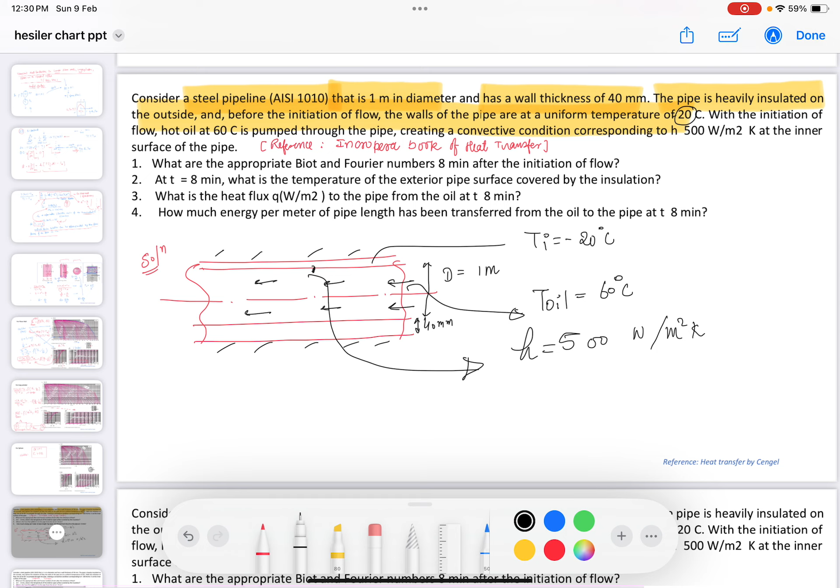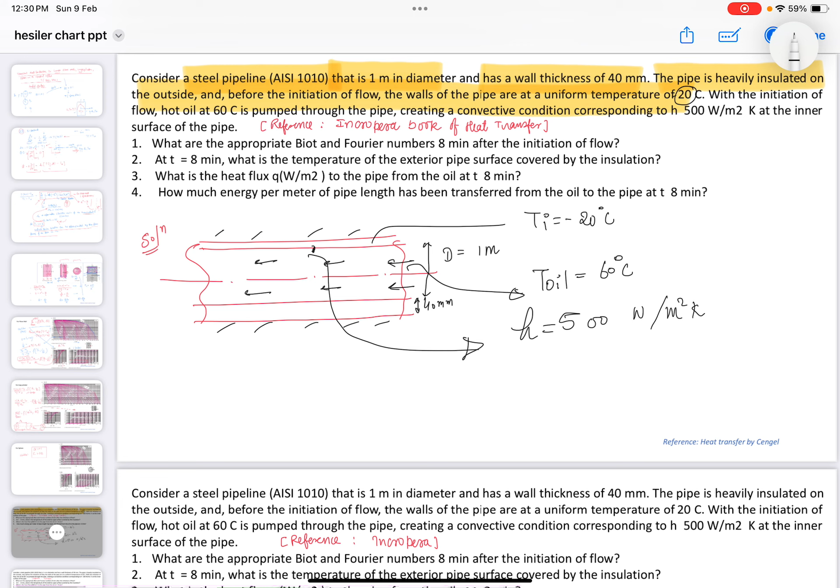So in the first case we have to find the Biot number and Fourier number. Before that, do you think we need anything else to solve this problem? Of course, material properties. Let me give you the properties for this problem.

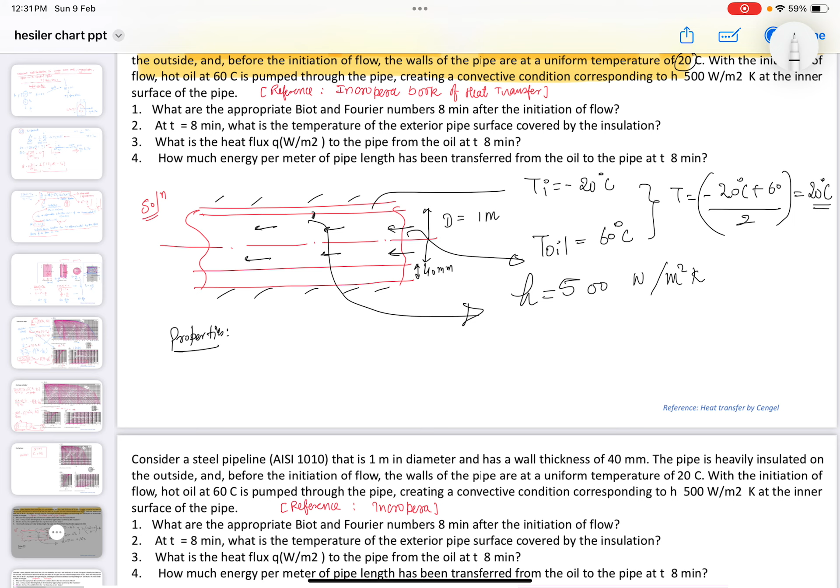Properties are generally a function of temperature for solids, and for liquids and gases a function of both pressure and temperature. But for simplicity of analysis, we take these properties at a mean temperature, which is nothing but the average of the two temperatures: minus 20 plus 60, divided by 2, giving 20 degrees Celsius. So properties are given at this temperature. For the solid, we need rho, specific heat, thermal conductivity, and thermal diffusivity.

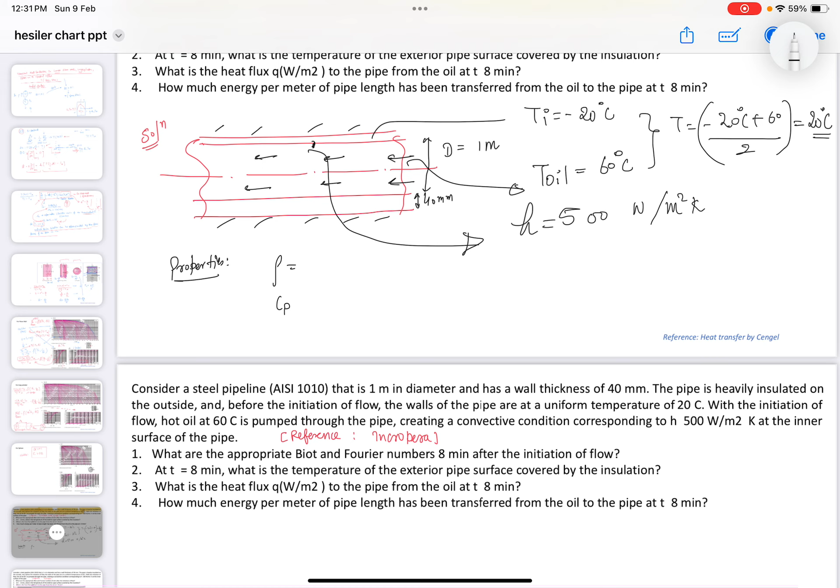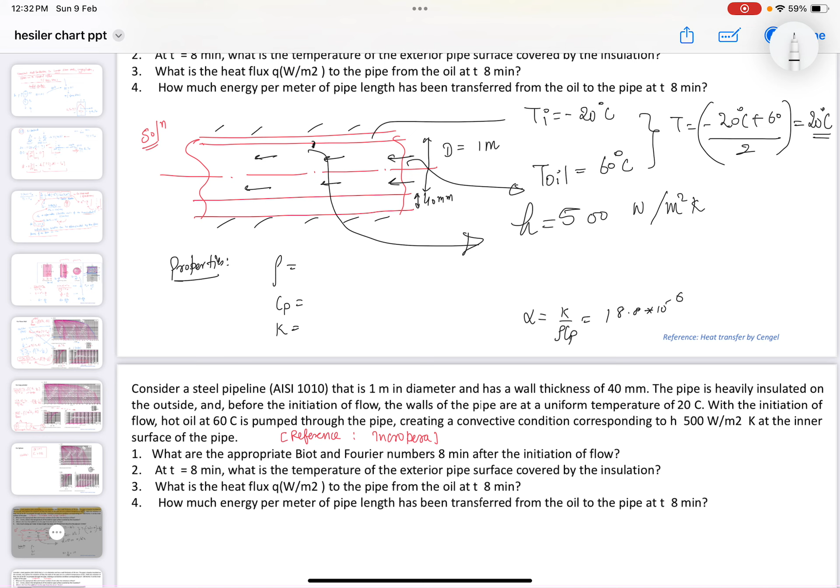Thermal diffusivity, which is nothing but K by rho Cp, is 18.8 times 10 power minus 6 meters square per second. Density is 7832 kg per meter cube. Specific heat is 434 joule per kg Kelvin. Thermal conductivity is 63.9 watt per meter Kelvin.

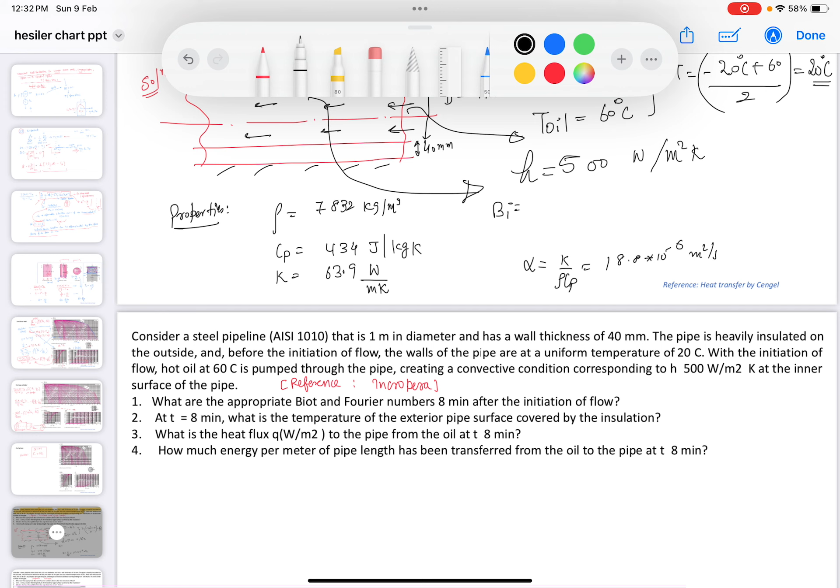Now we can find the Biot number. Using H, first we have to simplify the analysis - which geometry we should use. Since the thickness of the pipe is very, very small compared to the diameter, we can think of the thickness of the pipe as a plane wall.

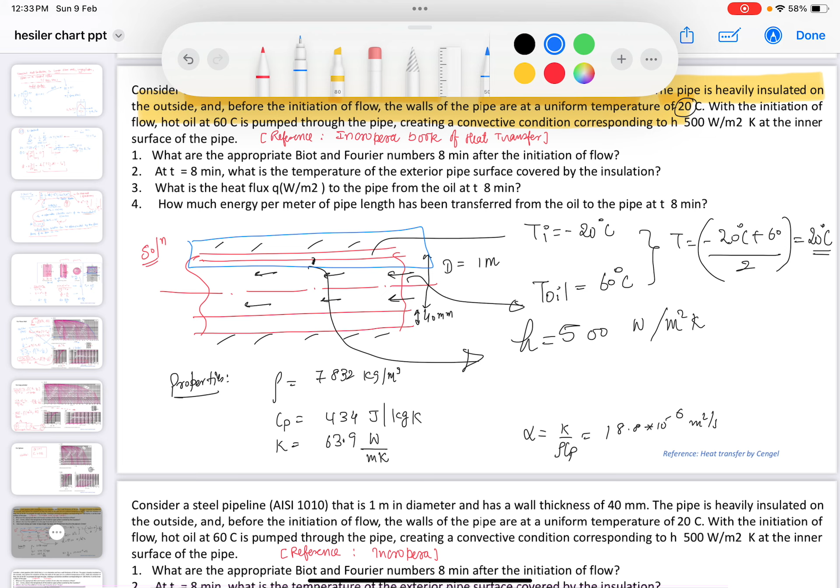We can consider this area as a plane wall, because the thickness is very, very small and we are considering only one dimensional heat conduction. Assuming it to be like that, it will look like this. If we see a close-up look, it has convection on this surface and is insulated on the other surface. So the plane wall case is very valid here.

H times T infinity - this is the x equal to 0 plane, and this is the x equal to L plane. This is steel, because of oil. So let's find the Biot number: it is nothing but H L by K. L is the thickness, 40 mm. H is 500, times L is 40 mm - we have to convert that into meters - and thermal conductivity is 63.9.

So the Biot number comes out to be 0.313, which is greater than 0.1. It means the lumped capacitance method is not valid here.

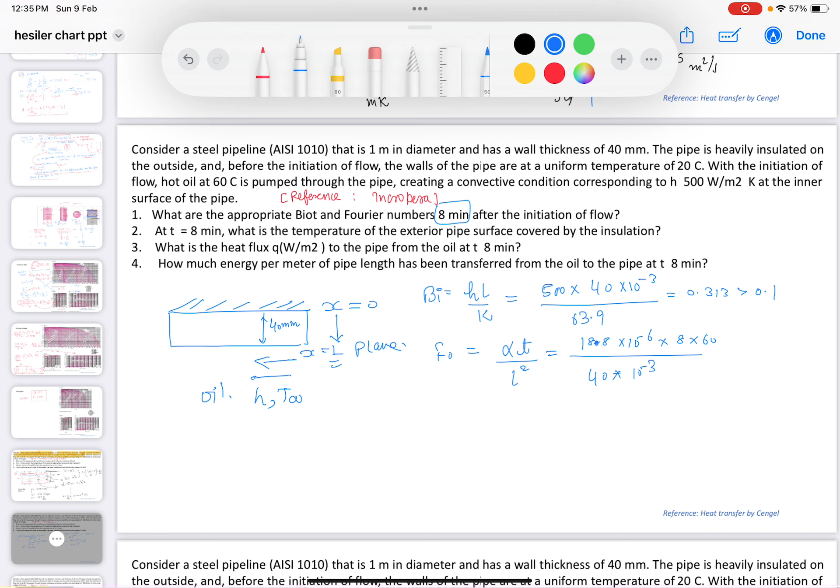Similarly, we can find the Fourier number. Fourier number is a dimensionless time, and for dimensionless time we need the absolute time - they have provided 8 minutes. L is 40 times 10 power minus 3, alpha is the thermal diffusivity 18.8 times 10 power minus 6, times 8 minutes means 8 into 60 seconds. The Fourier number comes out to be 5.64, which is greater than 0.2, meaning we can use the Heisler charts for further analysis.

Okay, so the first case is done. Now we want to find at t equal to 8 minutes, what is the temperature of the exterior pipe surface covered by the insulation - this surface, we have to find the temperature. The temperature profile will look like this, and we can think of it as a 2L thickness pipe plate, because it is insulated from air, so the slope will be 0 at this point.

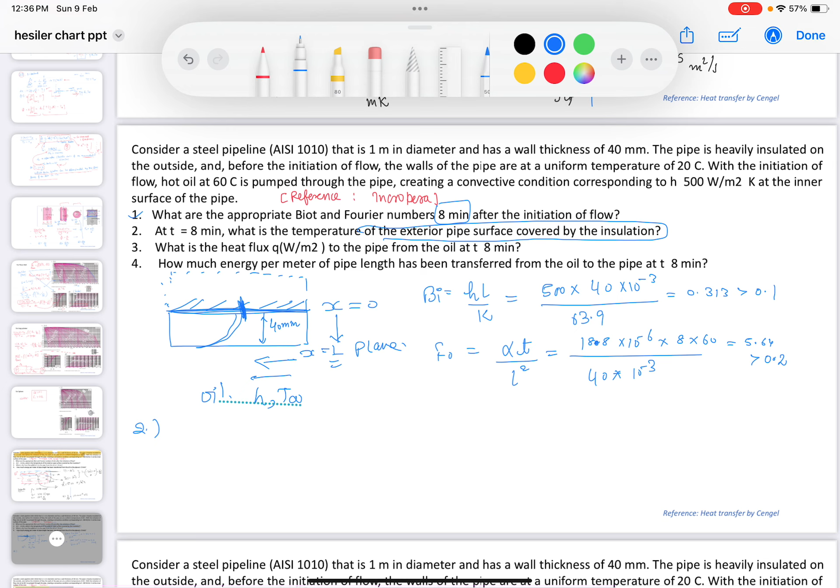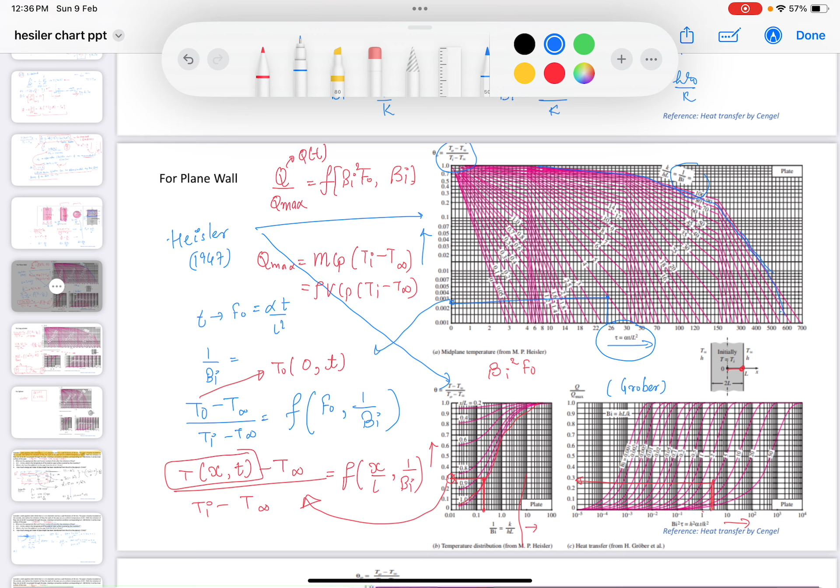So this information we now use. We have to find the temperature of this center plane. For finding the temperature of the center plane, we will need the reciprocal of Biot number, as we can see. We will be needing the reciprocal of Biot number and the Fourier number - Fourier number we have already calculated. So the center plane temperature, which we are calling the surface temperature, Ts minus T infinity upon Ti (initial temperature) minus T infinity, is a function of 1 by Biot number and Fourier number.

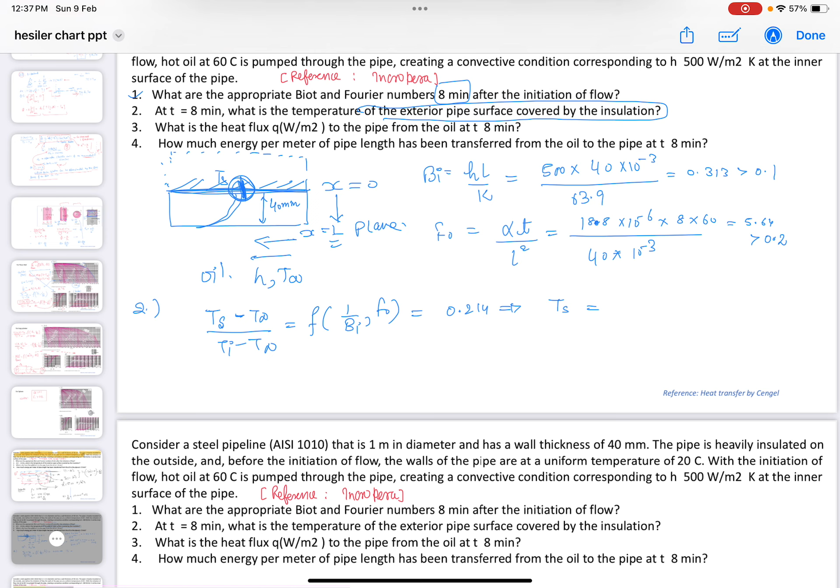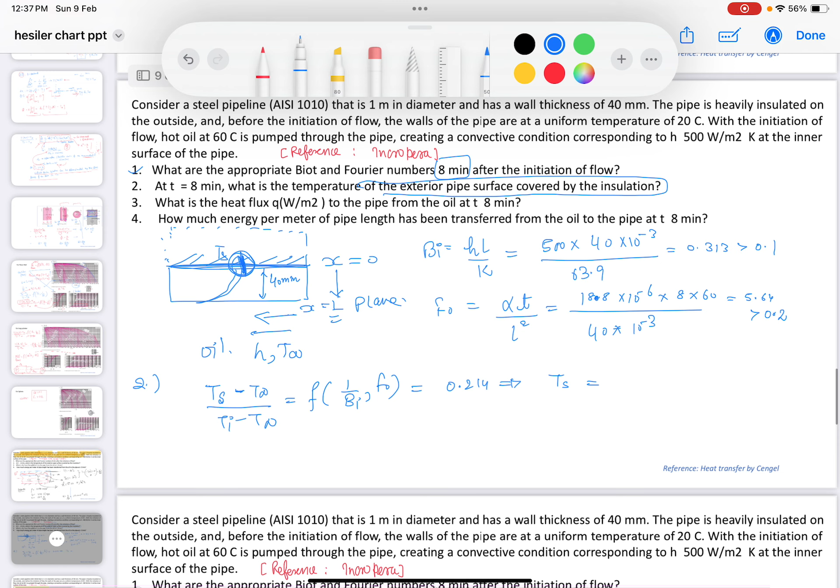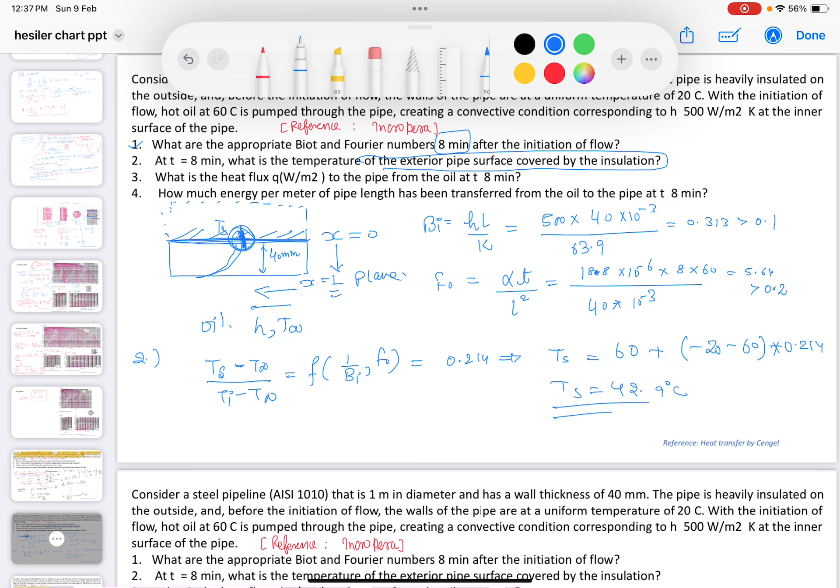If we find this from the chart, it comes out to be 0.214, and we can find Ts by inputting all the variables. T infinity we know - it is the ambient temperature, which is 60 degrees Celsius. So put that: 60 plus Ti is minus 20, minus T infinity is 60, times 0.214. So the surface temperature comes out to be 42.9 degrees Celsius. Initially the body is at minus 20 degrees Celsius. With the initiation of the flow, the surface temperature on the outside reaches 42.9 degrees Celsius.